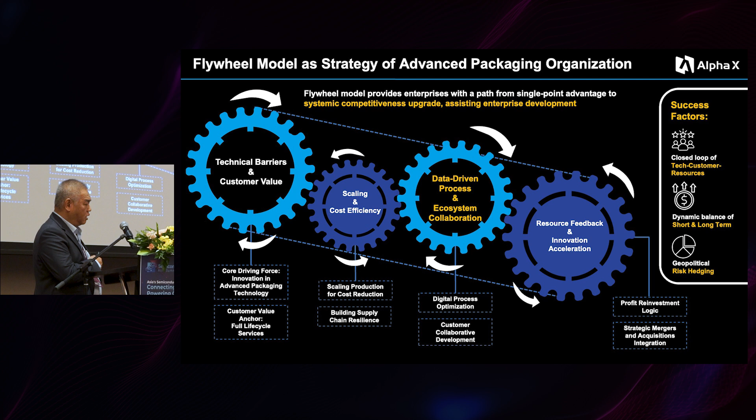But what I want to emphasize is that advanced packaging is not really a new topic. Advanced packaging actually came up back in year 2000. I think you have some friends from Infineon here. Infineon is the one that first came out with it. Then subsequently we have JCET, formerly STATS ChipPAC, that went into a very niche market. Then TSMC came in and tried to change the landscape, creating the Apple A10 processor with integrated fan-out technology. So TSMC is the one that made a lot of changes back in 2016.

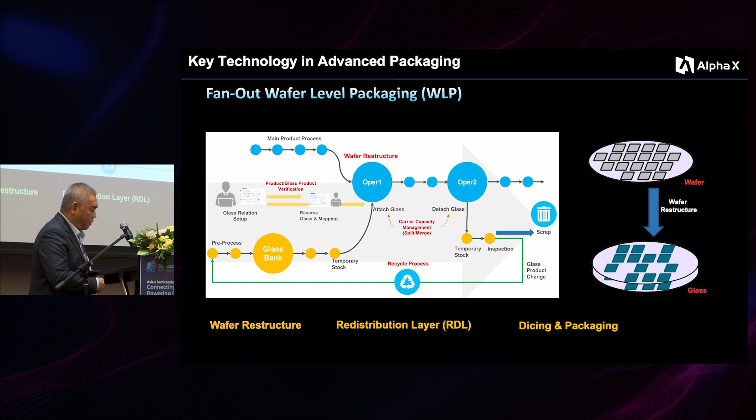And subsequently from 2018 until now, you can see that fan-out wafer level packaging is still an important technology used in 5G and automotive. So this is a really important technology we still need to keep in touch with. On top of that, a lot of people start to talk about 2.5D and 3D packaging. This is really another game changer, and companies like SK Hynix and Samsung really gained a lot through 2.5D and 3D packaging.

2.5D started to introduce the silicon interposer and TSV that do a lot of vertical integration. With this, we now have better performance and more cost saving. At the same time, for backend, we start to see more chip stacking techniques coming into place. And of course, in 2.5D we have hybrid bonding. Hybrid bonding covers a lot of front-end technology, from wafer bonding to layer-on-layer wafer bonding. Our team actually does a lot of research in this area.

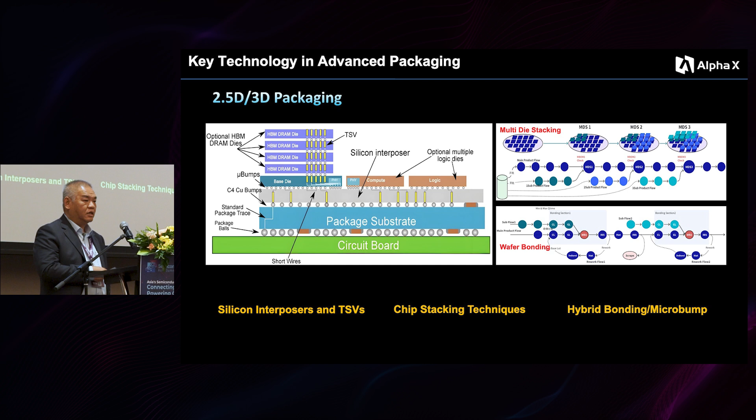And the more we do research, the more we learn, the more things we discover, and a lot more challenges we come across. Then 3D packaging came with more micro bump requirements. So those in the backend that do bumping can look into how micro bumping is done in advanced packaging. Going further, this morning we talked about AMD trying to break through with chiplets and putting all the stack together. That's really new thinking, and it actually saves AMD a lot of cost.

That now introduces a new thing called die-to-die interconnect. With die-to-die interconnect and all the processes, it's a new breakthrough, because now I'm no longer looking at the front end to give me chips that run on 2 nanometer or 7 nanometer, because that's very costly. Now, even with a lot of factories running at 55 nanometer or 20 nanometer, I can scale up all my processors. That's why AMD can now use a lot of this technology to do GPU design and all this together.

So that's why we call a lot of packaging platform. They actually introduced all this together. But nevertheless, I think testing and validation. I had a chance during lunchtime to talk to some of the equipment makers that look into how we use some of this 3D imaging. They do testing and metrology.

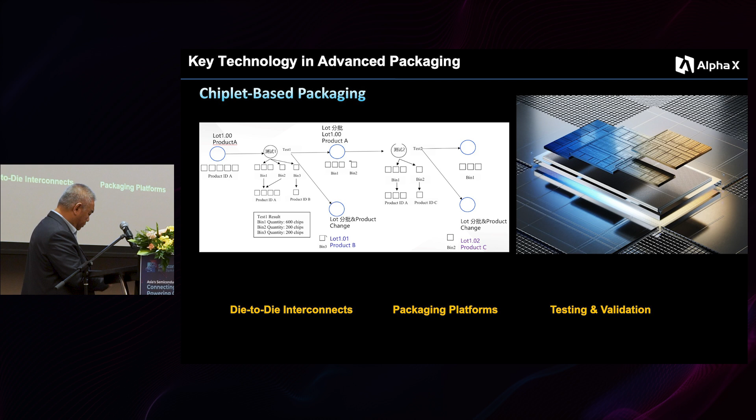I think in the morning session, we also shared some of the challenges that we used to encounter with testing and validation. So there's a lot of this hassle and bottleneck that we need to go through as we do testing in 3D packaging. Then, as we ran through a lot of the workshops with many of our customers, and also with all the users and factories, particularly in mainland China and also in Taiwan.

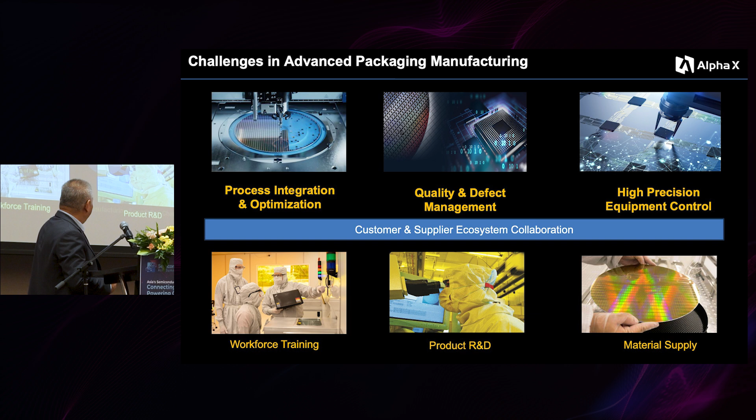But if we take a step further and look into the process integration and optimization, and go through the process map and all the product making process, I think we broadly gathered a lot of the advanced packaging issues into this area. It would be too much for me to go through each detail, but to summarize, the right side covers mostly material, process complexity, and how we manage all these processes.

This morning, one of the talks was about thermal management. With all the condensed chips in one single package, heat management, thermal management, is a critical success factor for your yield. And then on the left side, we start to look into a lot of integration. Integration means how do we integrate different components together? How do we integrate different data together for traceability? And how do we integrate all this data for better testing and inspection?

And not to mention, again, the process expertise and tuning. How do you tune my product? How do I adjust my design and recipe to cope with the design specification? So these are a lot of the process challenges that we see. In fact, as we go into many engagements with customers, it triggers a lot of manufacturing foundation changes, new ideas and thoughts on how we better manage packaging in the production flow.

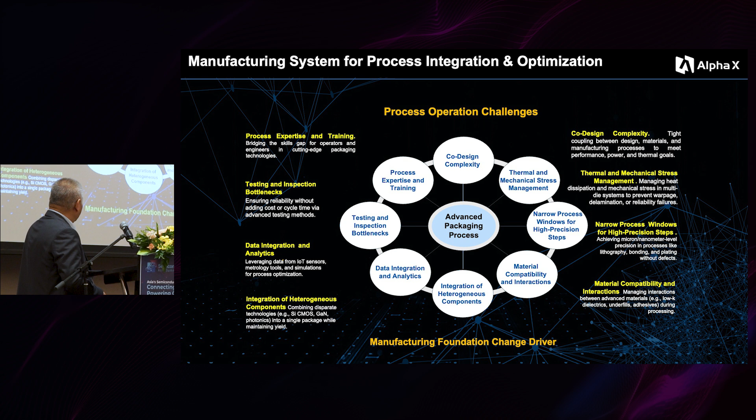So what we did is look into all the different layers. I will take 3D as an example: we break down all the processes, different bonding, the middle layer, and of course the board layer for board packaging. We map all this into process flows. And you realize that in traditional backend assembly, we're only looking at 30 to 50 processes, whereas in advanced packaging, we get into 200 process steps, more complexity, and more measurements that we need to introduce.

In fact, we also learned that a lot of front end thinking, especially in the wafer area, is now being brought from front end to back end. So there's a lot of know-how in how you manage your process flow and your BOM. Terms like equipment constraint and queue time were rarely heard in the back end, but for advanced packaging processing lines, they are getting more and more common.

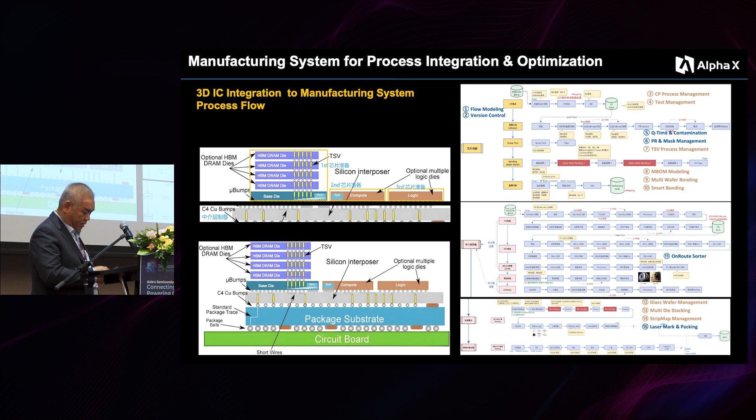So we then look into what kind of capability advanced packaging lines require—how we build a specification model, how we manage the wafer lot. This is not something we did in traditional backend before, but right now you have new functions like bonding, smart bonding, hybrid bonding, and also how we manage the TSV process, all in the backend now. On the backend side, you start to look into how you map your strip map into your wafer map, and then trace back to your wafer.

Your bin and test management becomes more and more challenging, which I'll cover later. Another example is equipment management capability and data traceability. Previously we only traced wafer to die, but now it's multiple die to multiple wafers, and then multiple die on multiple packages again. This introduced a newer standard called E142—if you check the SEMI standard, you can ask the organizer and they'll share more about this E142 standard. Hopefully more of our industry players adopt it, going back to answer how we actually do better product traceability.

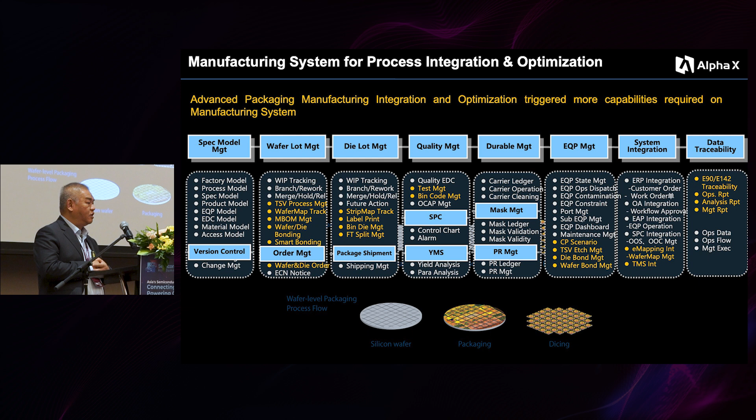Okay, so that's more on the process side and process integration. Besides this area, we're also looking into quality and testing management. This issue always comes up as you get into discussions, because of increased complexity and failure modes, and now the material and process will have much more variation compared to before.

Previously, when I got my product into my production floor, I could predict my end yield, predict my final bin, tell how much shipment I'd get. But today with advanced packaging, it's like putting it into a black box and seeing what comes out at the back. So this introduces the need for better quality governance, how we do material review board tracking across the whole process flow. Then reliability, durability, and cost of defect—all new topics that quality management teams need to address.

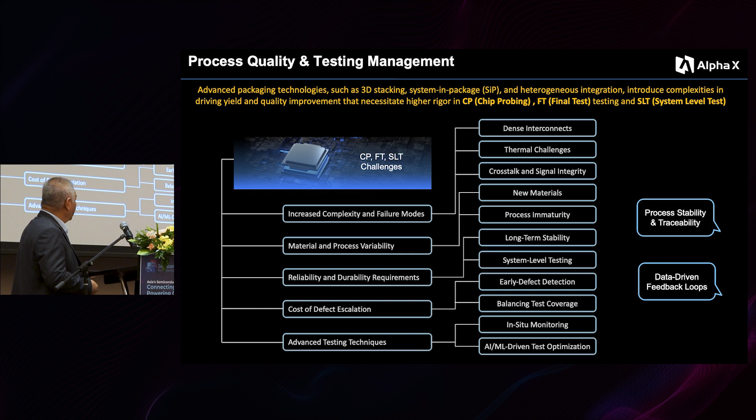Of course, advanced testing technique, in-situ monitoring, and this morning we also talked about AI/ML test optimization and these things. All in all, we are always trying to address product and process traceability and stability issues. More importantly, we also try to introduce what we call a data-driven feedback loop into our product and process.

So for us, defect management is definitely an important area. Just now in some of the KNS presentations, we also heard about image defect processing and classification. We're also getting new tools right now—we're using acoustic methods so that I can handle more defect detection.

But right now with advanced packaging, besides defects, we also need to look into test engineering. Take for example, now we have multi-layer bonding—how do I bond such that all the good bins bond with good bins? If in the multi-layer stack I have a bad bin in between, the entire stack that comes out will have a lower spec or even be a bad bin. That's why testing engineering with multi-stack imaging matters—you realize in advanced packaging there will be multiple pre- and post-CP tests.

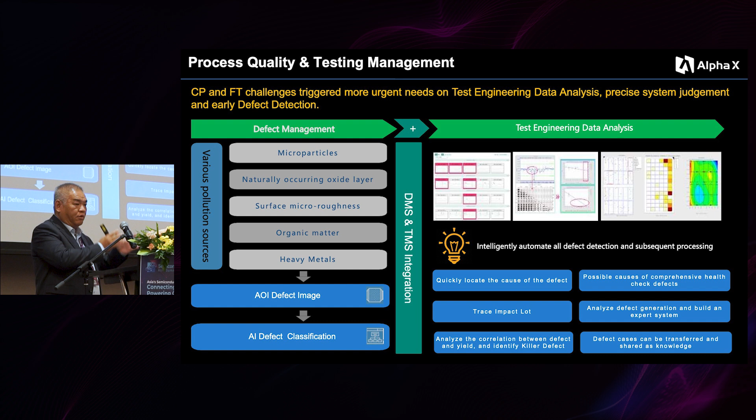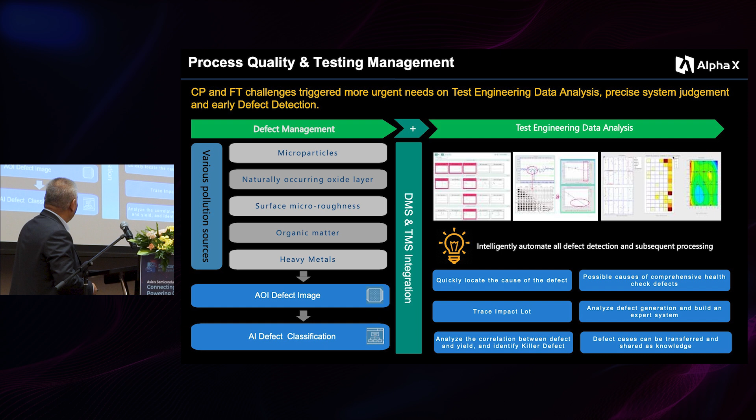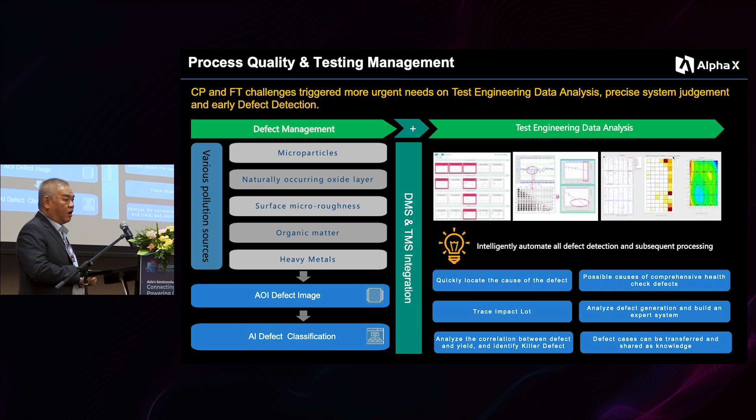As you go into different processes, your test map pattern will start to change. That's why test engineering and data analysis become very challenging topics—how do we actually detect all these defect areas so I can avoid more losses at the back. For manufacturing or line people, you know the cost of production increases as you go further into production, so we need to detect these defects at a much earlier stage.

Then comes equipment, which is also a hot topic. We always end up in a lot of debate and discussion. Honestly, I don't have all the solutions because right now, for advanced packaging, we talk about sub-micron feature sizes and 3D architecture.

Traditionally, with the die, you only looked at 2 dimensions, whereas now with advanced packaging, it extends into multiple die and multiple 3D displays on the package itself. So how does the equipment handle all this, and especially now with high mix production, how do you mix customer spec with production output together?

And yet all these shipments also need to meet reliability and compliance. That's why in some production lines they check before shipment. Now more and more companies start to ask for COC, Certificate of Compliance, which tells you the specification of your product as it came out from this equipment or the list of equipment that processed this material.

A lot of the high precision equipment always comes up in areas like die placement and bonding. I think we also heard some sharing sessions on this later, but it's definitely a very challenging area - hybrid bonding for the wafer, lithography and patterning. This is probably a new area for back-end people, but it's quite common in the front-end part. Then there's metrology, inspection, and all this.

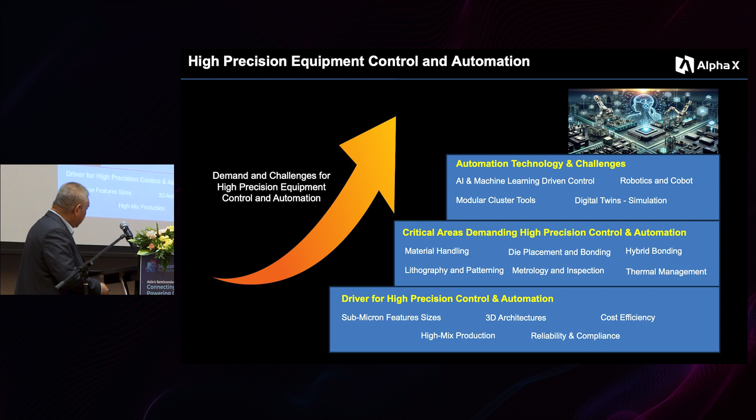So what happened is that a lot of these things also introduce a lot of automation requirements. For Alpha-X, this is our core as well. We actually have a lot of real-time equipment communication with many tools. We work with many equipment makers, also with manufacturing, to look into how to actually do real-time equipment communication with our own standard and non-standard protocols.

You realize that a lot of the equipment now used in backend doesn't always have SECS compliance. We also have a lot of PLCs, and for some equipment that we gather from countries like Japan, if we want to do more advanced process control, that's always a challenge. That's why we actually created all this real-time communication and made it into a digital twin.

So today you are able to gain better insight. The production people start to see how the equipment works - if, let's say, I have material stuck in my equipment right now, I'm able to detect where the problem is.

So we also have an automation flow right now. It's really true - today, if you want to do equipment automation, you no longer need to have programming skill. You can actually configure your equipment automation. But this is not enough.

I think more and more people start to get more trace and sensor data, and now you build a lot of models. So you see more and more equipment makers building their so-called models, their principles, control limits, and all these things into a more advanced control chart, so that with this control chart, I can detect my failures much in advance.

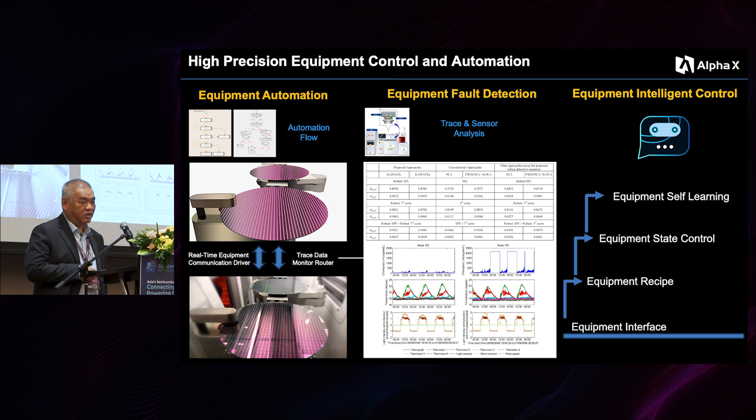No. In fact, now we even have so-called smart equipment that can do pilot runs, meaning I can send some die or some material over to do testing before I send the full part of my material. So that's more of the equipment state control. In fact, one of the challenges we're working on right now is that you can talk to the equipment and make it more self-learning. So this is what we call the next vision for Alpha-X - to actually make self-learning equipment.

We believe that when machines meet AI, they will introduce a lot of new possibilities that we cannot solve today. Equipment fault detection and classification is not really a new topic anymore. A lot of people start to ask, what is the possibility with AI? What's the possibility with all the new DeepSeek in town? What are the things that we can discover?

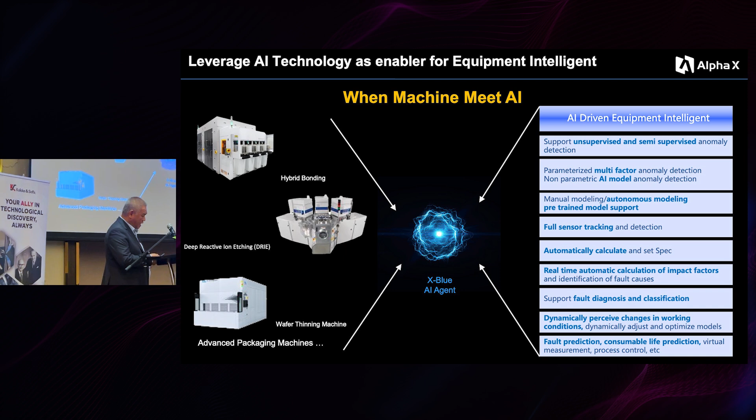So I summarized it into maybe four angles. A lot of factory engineers today tend to believe, based on historical experience, to look into what are the problems we can solve and look at what are the problems that we see. This is the zone most engineering work is focusing on right now, leveraging the equipment manual, the SAS log that we have captured so far, and the history record that we capture.

But today, with AI, you go into a new dimension of how do we solve invisible problems, and how do we actually avoid the problem. If I know that a problem will come, why do I hit the problem and then tell you that this needs to change or adjust? So for us, we are looking at how do we avoid the problem and how do we discover new techniques or methods to solve my yield, process, or defect issues. We believe this is a new value creation with AI.

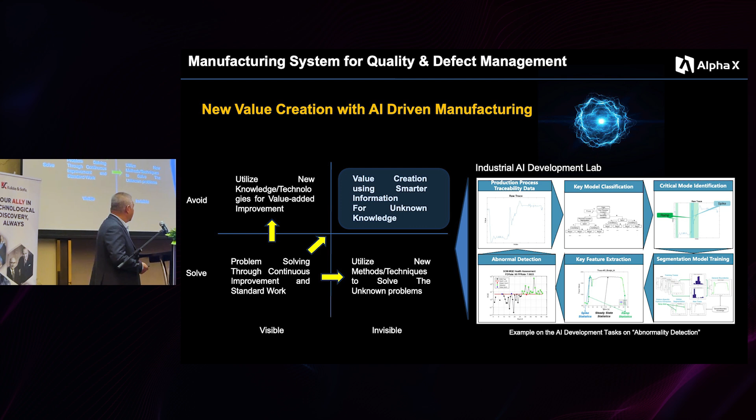So we created what we call the Industrial AI Lab in Singapore, collaborating with some universities in the US and also Singapore to develop all this. As we go into this area, many companies will realize it must be a big investment. With DeepSeek coming in with the so-called large models that we have, there's going to be a lot of investment for many companies. So I think that's how Alpha X was born, because we carry a lot of different thinking to help manufacturing revolutionize in this whole industry.

So a lot of the solutions, the manufacturing foundation capability that we have, we actually build as part of what we call a manufacturing system foundation. We work with many customers to build a lot of this capability as part of the system. That is how we know how to solve the problem.

At the same time, just like semi-standards, just like all the industrial ISO standards, Industry 4.0, we incorporate this into industry standards and practices, so that essentially we combine all these things into an industrial semantic model. For those involved in ChatGPT and AI, you realize there's a lot of work involved in this area because everyone speaks a different language. So that's why we built all these standards together.

And more importantly, there are so many of these providers - AWS, Microsoft, Google. Now we also have Tencent, Ali. All these different models come about, and each time I need to pay for the token, it's going to be very difficult. But for me, I just want to use it. So that's why for Alpha X, we combine all this and create what we call a model as a service, managing model deployment, model self-learning, pre-trained models, all these things.

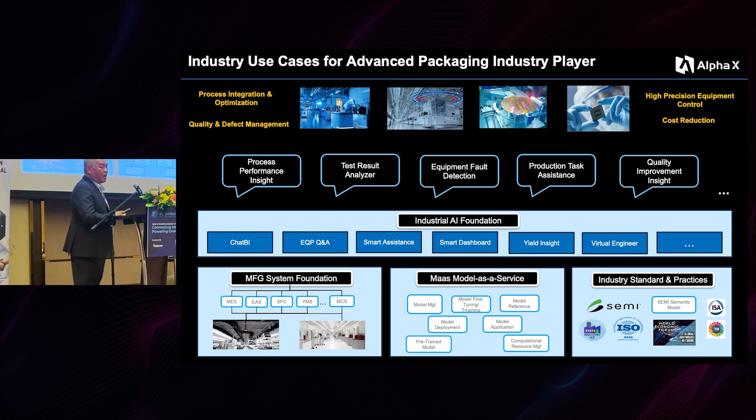And essentially what we try to do is - manufacturing people are very strict people. I only want to use the tool that I want to use on my production floor. So we created what we call a Chat BI, a business intelligence chat that looks into how your manufacturing process flow works, how I do a pass down, equipment Q&A, engineering assistant, and all these things. So that consolidates into a more relevant tool used by the manufacturing company.

And what we are looking at is to work with all these companies to create a lot of use cases to help manufacturing. Given the time, I probably won't run through each use case, but we are open to share this in many sessions with you. We are also looking at industrial collaboration, so we are happy to hear your pain points and challenges as you go into the advanced packaging area, and identify opportunities for new innovation. We are happy to work with you in this area, and work out a roadmap and partnership together with each company to develop this AI journey forward.

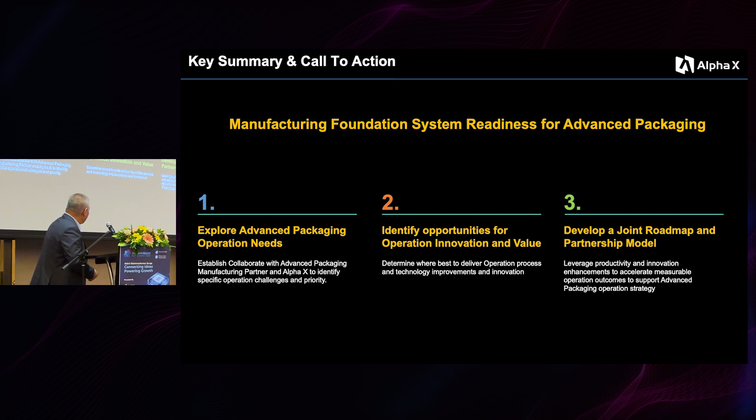So in short, our vision is to make manufacturing more intelligent. Okay, thank you so much.